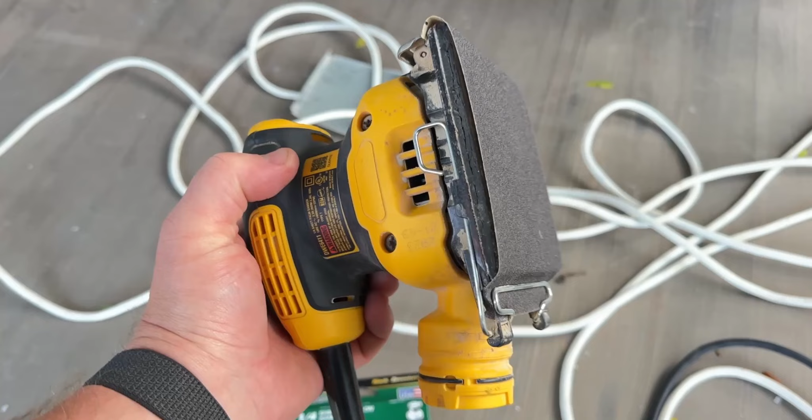Today I have a pretty simple model for you. We have been doing a lot of renovations to the exterior of our home, mainly working on the front porch. Right now we are refinishing all of our siding. I'm super cheap, so I'm not paying someone to do it. I have misplaced the little tool that punches the hole in the sandpaper for the dust collection on my DeWALT palm sander, and so we're going to create that today. I'm sure this model exists already somewhere online, but I enjoy designing things and creating them and 3D printing them, so I figured I would take you along for the ride.

So let's hop into Fusion and we'll get started. I have already taken all the measurements I need for this model, so I'm not going to show you that, but we're going to start with a simple sketch.

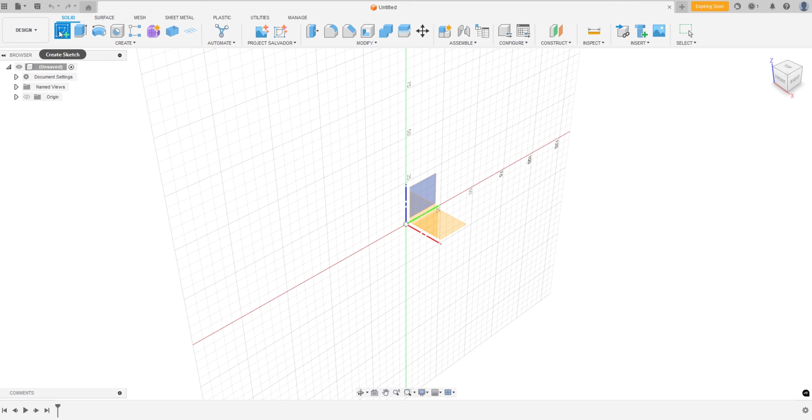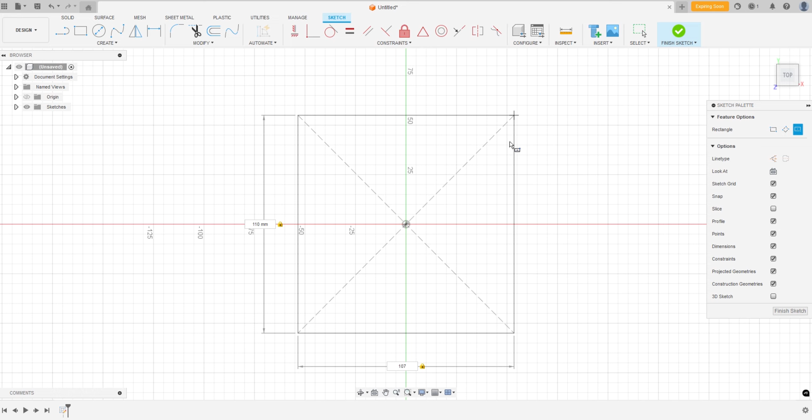We'll go up to create sketch here and we're going to just go on this bottom plane. I'm going to hit R for rectangle, and I want to draw a rectangle out from the center of the origin, so we have to click the center rectangle button here. We'll click on the origin and you can see the measurement on the left here highlighted in blue. I'm going to type in 110 millimeters. I'm going to hit tab to go to the other dimension and we're going to do 107 millimeters and hit enter. That is the size of the bottom pad of my sander.

This sanding pad has 8 circles that go around, and the circles are 43 millimeters from the center, so we can do a little math here and get this pattern. Now, one of the circles, if you see this green line, does not line up with this green line. They're actually evenly spaced on either side of the green line. So we can do 360 degrees in a circle divided by 8 is 45 degrees, and since we're splitting it down the middle, we're going to divide that again, so 22.5 degrees.

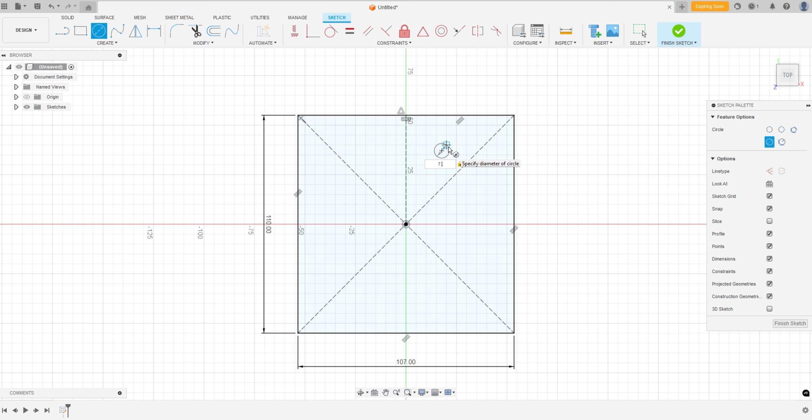So let's do a few construction lines here. I'm going to do L on the keyboard for line, or you can click this button here. You can click X on the keyboard to make it a construction line, or you can click this button here. So I'm going to click on the origin and just drag up. I'm going to hit X on the keyboard again just to get out of construction, hit escape to get out of my line tool, and I'm going to hit C for circle, and I'm just going to draw a circle about 7.5 millimeters in diameter. The holes on the sander are 8 millimeters in diameter, so I'm just going to give myself a little bit of wiggle room making this a little smaller. So let's hit L again and X again to make it a construction, and I'm going to click the origin and then click the center of that circle and hit escape.

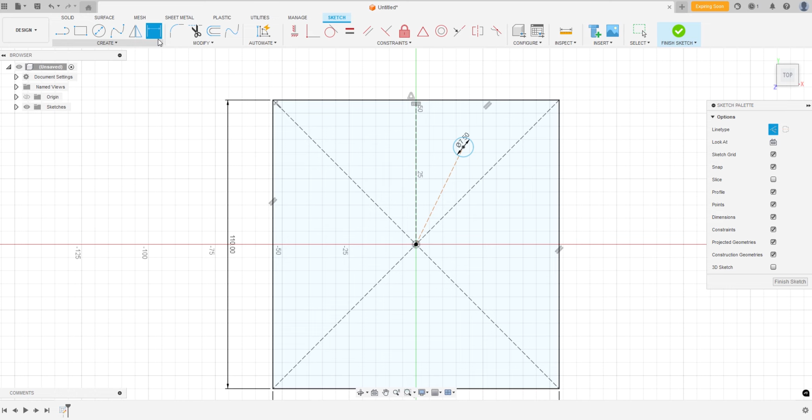So from here, we want to dimension the length of this line. I'm going to hit D on the keyboard, or you can click sketch dimension here. Click this line, and I'm going to type in 43. I'm still on the dimension tool, so now I'm going to click this line and this line to get an angle, and I'm going to type in 22.5, hit enter, and hit escape on the keyboard to get out of that tool. I'm just going to drag this out of the way.

So now we know we have our circle in the right position, and now we just need to pattern it around. So I'm going to go up to create and circular pattern. The object we want to pattern is this circle, so I'll click on the circle, shows one selected.

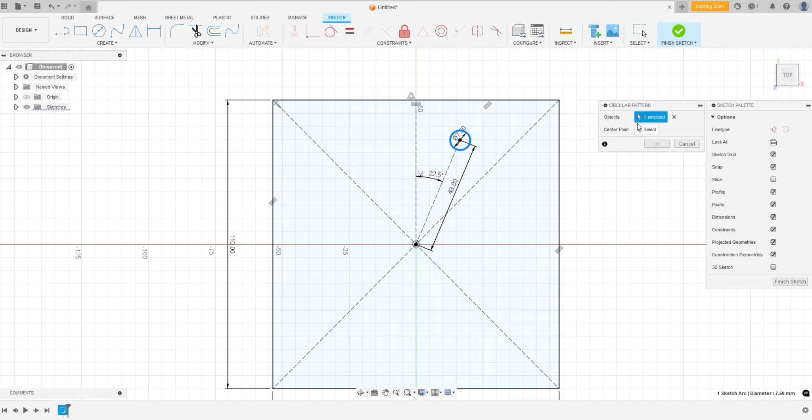Then we want to click center point, which will be the center of our square. And you can see right here, it starts with 3. So here's the first circle, second circle, third. We want 8, so I'm just going to type in 8 and hit OK. And there are my circles.

Before we get out of this sketch, I want to do one more thing. I'm going to hit R for rectangle, and I don't want a construction line, so make sure that's turned off. I'm going to make a little guide for this punch tool, to reference the top of the sander. So we're going to make a little lip up here. I'm going to click on this corner, without clicking again move my mouse to this corner and then drag up. That kind of locks this vertical position here.

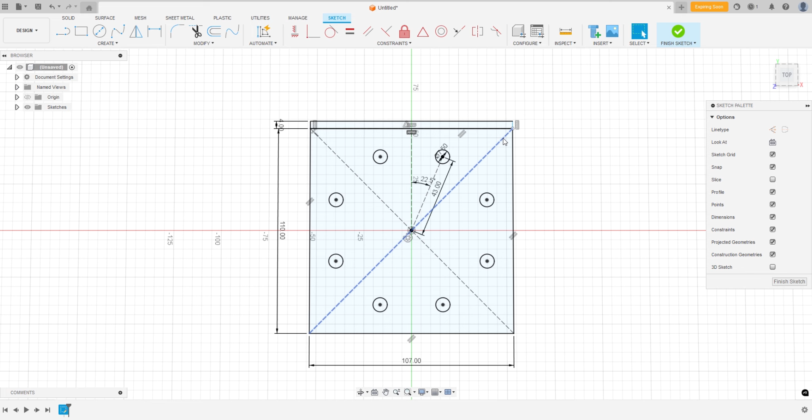And now we will turn this into a little lip. So I think that's about all we need to do here. I'm going to finish sketch. Now I'm going to select everything and hit E for extrude.

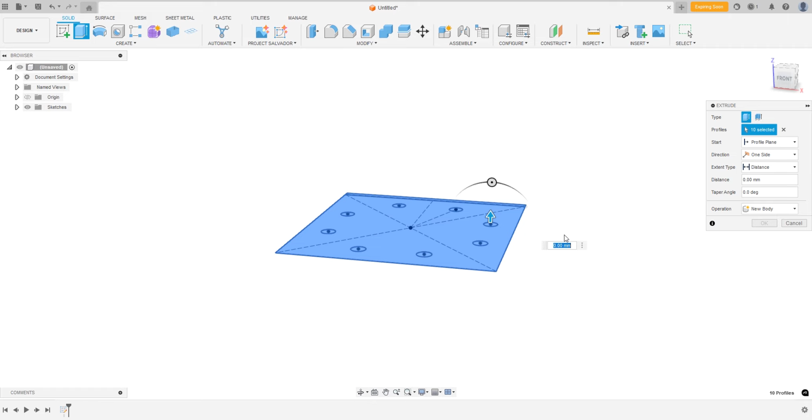And you can see the arrow. If I type in a positive number, it's going to extrude in this direction. I want to go in the other direction, so I'm going to type in -4. I want this to be a little bit thicker. 4 is not too bad, 4 millimeters, and hit enter.

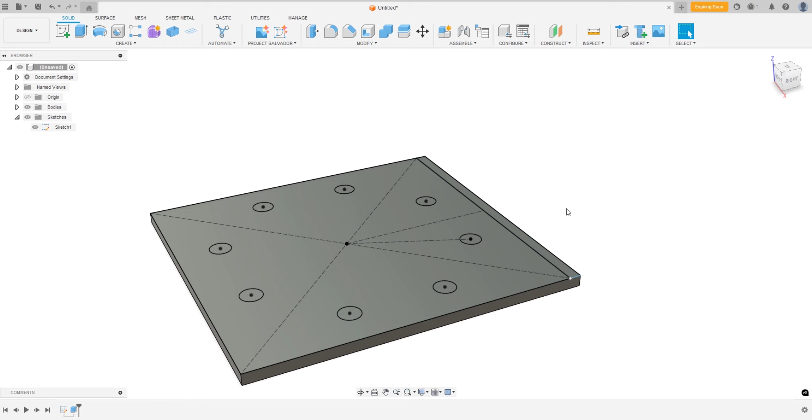Now, after you create a sketch and then use that sketch to create a solid body, the sketch will sometimes hide. What you can do is go over to this folder, hit the down menu here, and turn that sketch back on. Now we're going to extrude just this profile here. I'm going to hit E for extrude, and extrude this up about 6 millimeters, 1/4 of an inch.

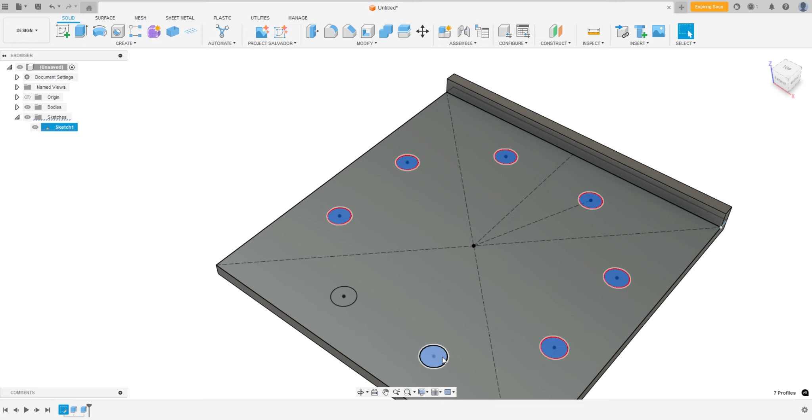Now we want to extrude these little punches. So I'm going to click each one of these profiles, holding Shift on the keyboard to select multiple. Once I have all those selected, I'm going to hit E for extrude, and we'll extrude these up, maybe, I don't know if we have to go full 6. Let's just go the full 6.

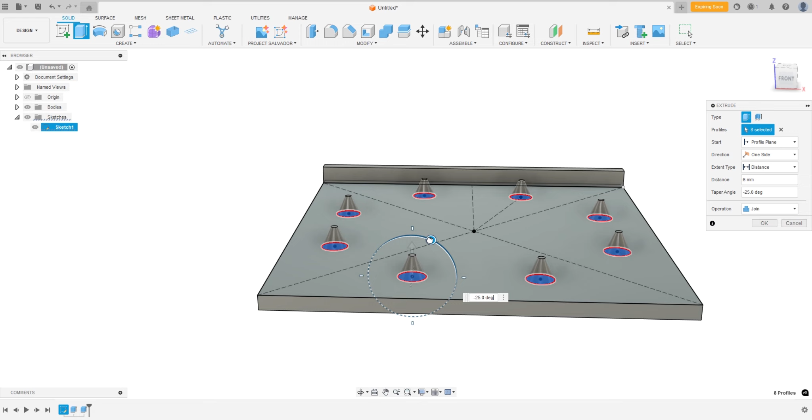And you can see this little handle right here, this controls the extrude angle. If it's kept at 0, it just extrudes straight up, but we want to make this into a point. Let's see what 30 would look like. Let's go with 25 degrees there, and I will hit OK.

Now we can hide that sketch, and we have a nice little hole punch out. Now, before we do the finishing touches, and only because this is a 3D print and I want to waste as little filament as I can, there's just a lot of space here, a lot of filament here we really don't need.

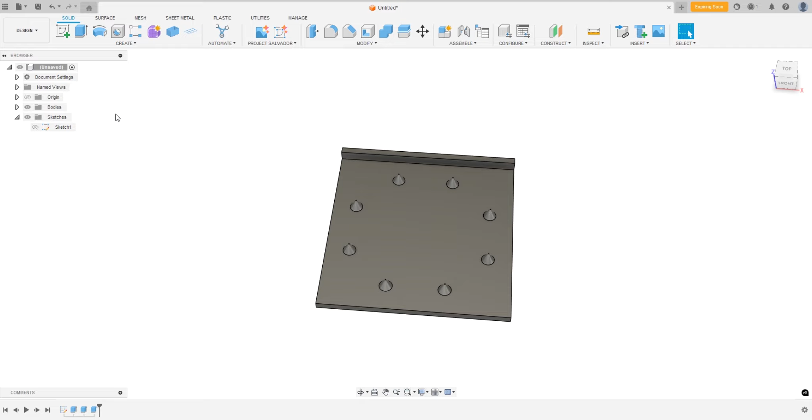So we could have done this in the first sketch, but I'm just going to create another sketch right here. Click on this surface. I'm going to hit C for circle, and let's just drag this out. Oh, 50 looks good. We'll do 50 millimeters and finish sketch.

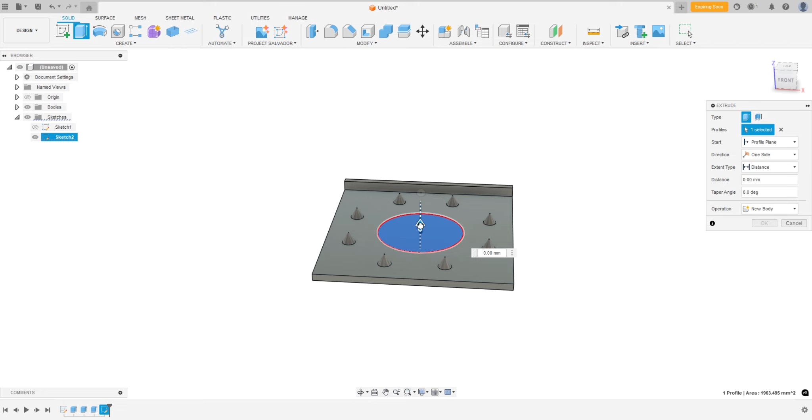We can click that sketch profile, hit E for extrude, and instead of typing something in, we can just click on this arrow, and if we go up it will create a new body because there's no solid body in its way. But we're going to extrude downward, and it'll automatically turn red, which means it's going to cut. So let's hit OK.

All right, so I think we're going to do a few more things. We're going to chamfer all these edges to get rid of these sharp corners. So I'm going to hit the chamfer tool, and I'm just going to select the faces.

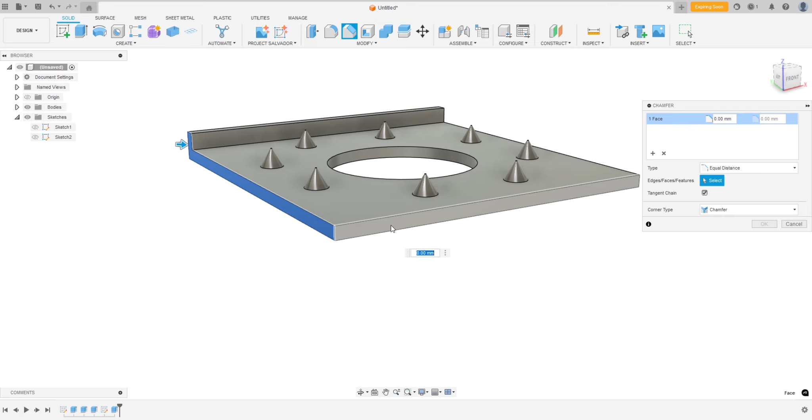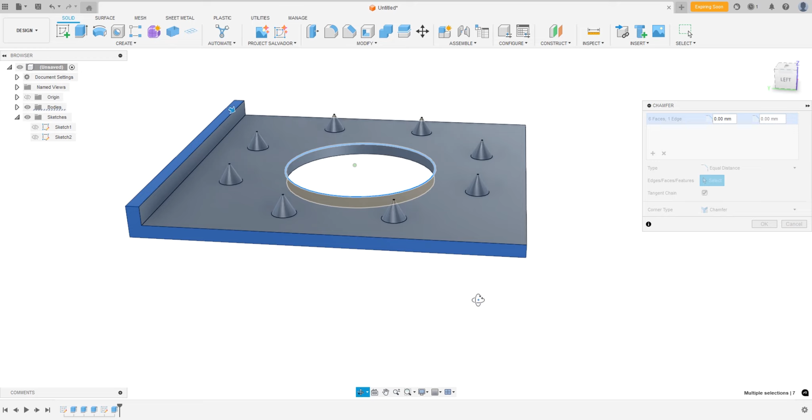When you select a face, it will chamfer all of the edges connected to that face, or you can select individual edges. I don't want to chamfer this whole face because I don't want to chamfer these cones, so I'm just going to select this edge, this one, and this one. I think we have it all covered - basically everything but this surface here. So I'm just going to do a 0.3 chamfer.

That's my go-to for cutting off sharp edges. And like I said, I didn't want this chamfered here - it'd probably be okay, but just in case it interferes with lining up this tool.

The only other thing I'm going to do is create my own brims on these corners. For 3D printing, any sharp corner like this has a good chance of lifting off the plate. Instead of doing those brims in Slicer, I like to do them in Fusion when I can - I feel like they work a little better.

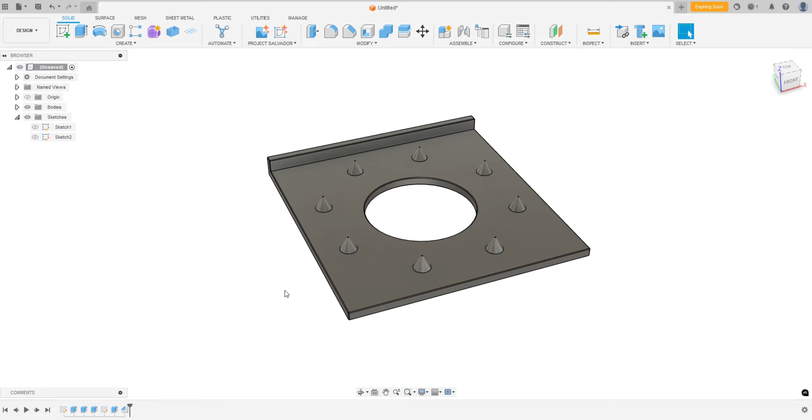So I'm going to create a sketch on this bottom surface. I'll hit C for circle, and it should kind of reference these corners here. I'm just going to click, and we'll do a 20 millimeter circle, and we'll do this for all of these corners.

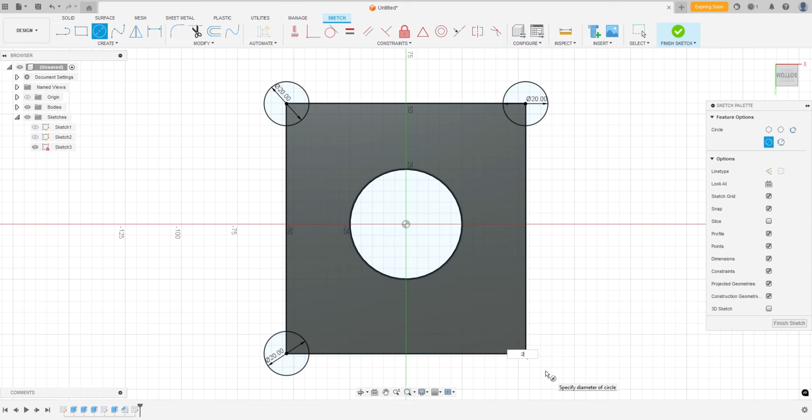The trick here is extruding it to the same height as your layer line. So once we finish the sketch, our layer lines, when we 3D print, are going to be 0.2 high. I'm going to select these sketch profiles, holding Shift to select all of them, then hit E for extrude - you can see it wants to extrude downward because of how we drew the sketch. Technically it's up, but we want to extrude the other way.

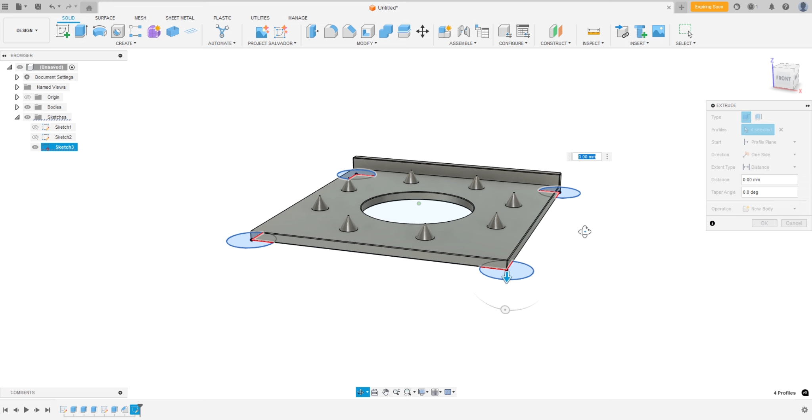So I'm going to type in -0.2, and you can see it's turning red because that extrusion is running into the solid body that's already here. But I'm going to join this instead of cut, and hit OK. Now it just creates those brims as part of this bottom layer.

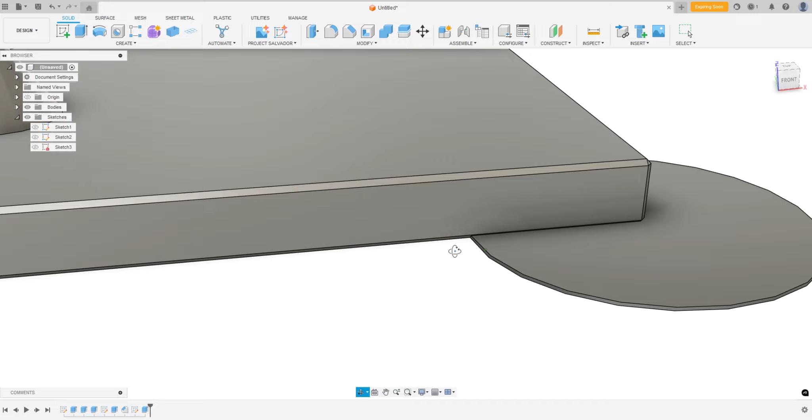Because we put that 0.3 chamfer on this edge, you'll be able to cut this brim away with a little utility knife. Super easy, and it comes off really nice. You might not be able to break them off, but you'll be able to cut them off really easy, and it gives a nice finish.

So I think that's about all we need to do. Now, one measurement I didn't get is the height of this cone, so I'm hoping these cones aren't too tall. If they are, you can go back to this extrusion - this one right here in our timeline - and just not extrude it as high. But that's just something you have to print and test out. The other thing I'm not too sure about is if the height of this lip needs to be taller. But we're going to just send this to the printer. I'm going to print it in some PLA, and I'll cut to that video next.

All right, so let's try it out for the first time - I'm doing a little voiceover here. The part printed pretty good, it works as it should. The only thing I'd probably change about this design is that little front reference lip - it could be just a tad taller to make lining it up a little easier. Maybe overall the thickness could be a little thicker to make it more robust, but it works great. If you want to download the model, the link is in the description.